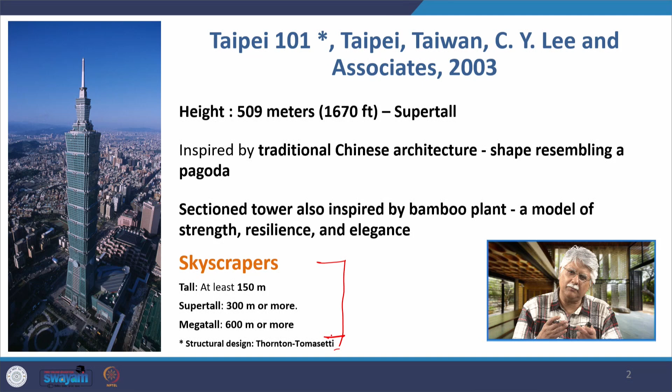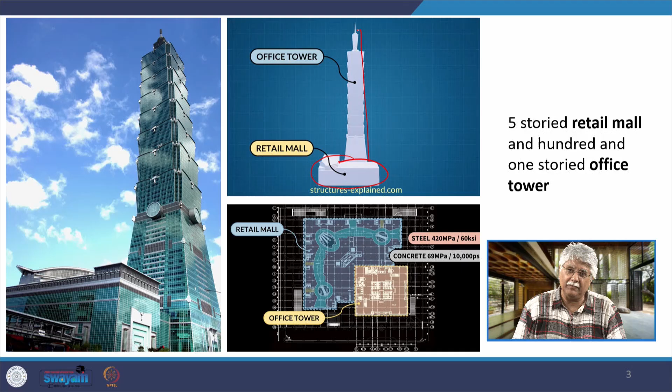This is what I was talking about, the various levels of skyscrapers: tall, super tall or mega tall. Taipei 101 has a 5-storied retail mall, and behind that is the 101-storied office tower. The structural design is based on the mega column and mega frame layout.

This, for example, is the mega column. This mega column is 3 meters by 2.4 meters. It has studs in it, internal ties, welded splices, and then it is filled up with concrete. So these are steel boxes, these mega columns filled with high strength concrete, and they form the basis of this mega structure of Taipei 101.

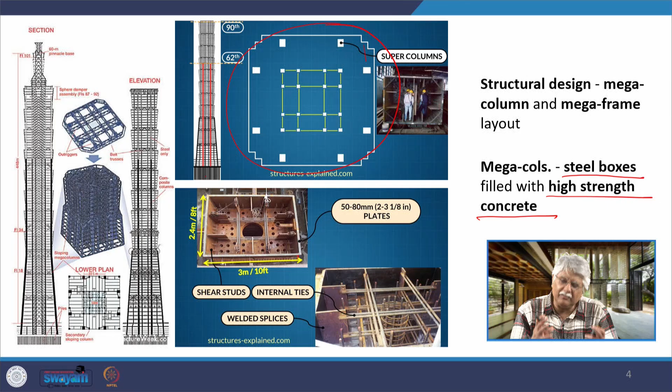There are 8 sections of 8 stories each within the Taipei 101. These sections and the top spire are shaped resembling a bamboo stalk or an elongated pagoda, so the 8 sections are like the sections we see in a pagoda.

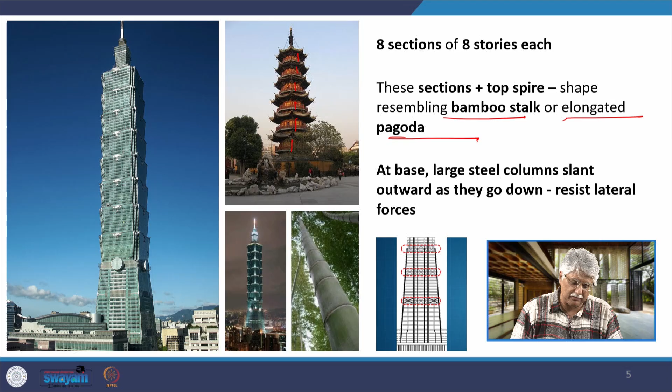At the base, the large steel columns slant or incline outwards as they go down to resist lateral forces. Now the tuned mass damper, which is one of the key features of Taipei 101, prevents the building from swaying too much in either direction.

It's an 800 ton, 6 meter diameter ball of welded steel plate, suspended from cables like a pendulum, working on the principle of inertia. It hangs inside the top of the building and is visible even from the restaurant and bar. How it functions is very simple.

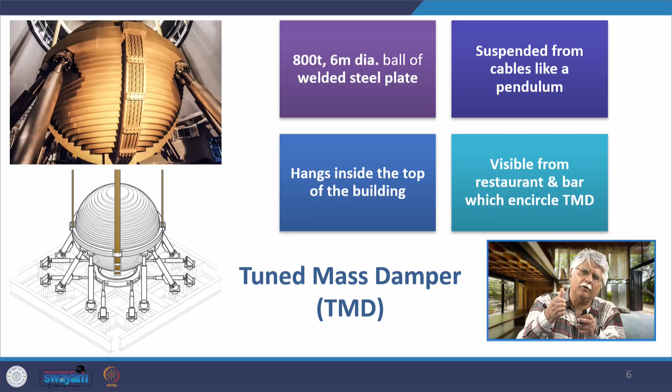When the building sways in one direction, because of inertia the ball doesn't sway, and thus it is able to pull back the building from the sway to its original position. It helps stabilize the towers in high winds and earthquakes, and also reduces the sway caused by typhoons.

This is how it hangs in the building, somewhere at the top. Occupant comfort increases during strong winds due to the tuned mass damper because it damps the sway. It can reduce the tower's movements by up to 40%. The TMD components were made in Canada, France and Italy, except for the massive steel plates, which were made in Taiwan itself.

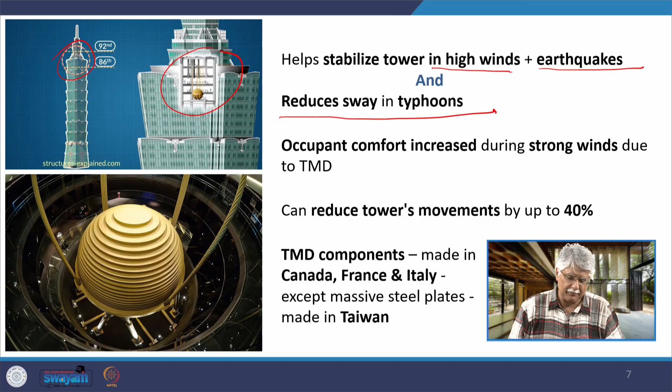Visitors in the restaurant, bars, and observation decks between the 88th and 92nd floors are able to see this huge gold ball of 800 tons. It has been said by one of the people of the building that this serves as a source of comfort, since people feel safe because of this massive damper.

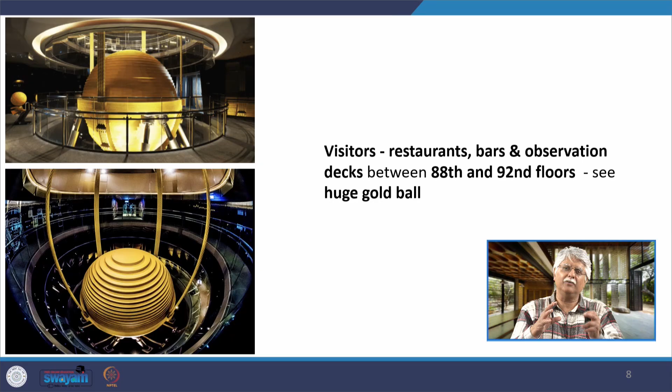When high winds and earthquakes cause swinging of the pendulum, it is restrained at the bottom of the sphere by large steel pins of 60 centimeter diameter, which engage piston dampers. There are piston dampers in the surrounding restraint ring located at the bottom.

These piston dampers restrain the ball from moving too much, and the TMD offsets the wind-induced motion of the building. Otherwise there would have been a tremendous sway that people would have experienced.

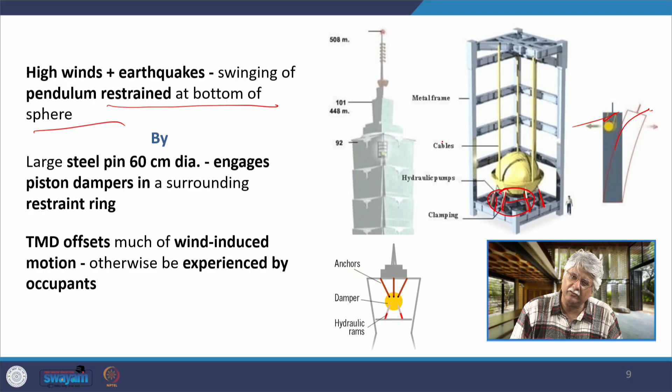As you can see here, as the building sways outwards, the mass damper remains where it is and is able to pull the building back to its original position. The most innovative feature of Taipei 101, besides the mega structure, is the tuned mass damper.

Now we come to the Hearst Tower, another project by Norman Foster in 2006. It's not a very tall building, just a tower mounted over an existing Art Deco style base structure designed by Joseph Urban in the early 20th century, featuring sculptures.

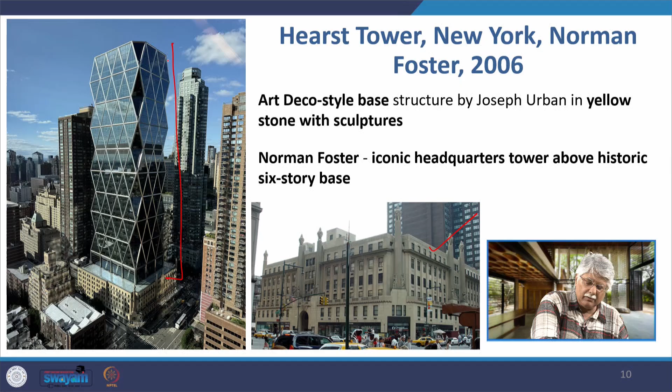This is that building. Norman Foster erected the iconic headquarters of the Hearst company over the 6-story base, using a diagrid frame to construct this building.

This building was the first commercial office building to get the LEED Gold certified rating for core and shell interiors in New York. The US Green Building Council considered it for this certification based on, firstly, the innovations adhering to principles of sustainable design and construction.

We will see the types of construction products, finishes and furnishings used by Foster in the design, the use of water and energy, the selection of the site itself, waste management, and indoor environmental quality.

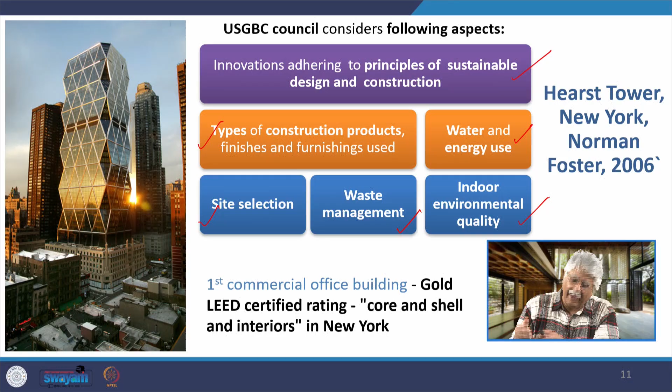Now this building saves both space and materials. Let us look at the material part first. Because of the perimeter diagrid system, it saves 20% structural steel as versus a moment frame structure.

That means if such a tall building was designed by Mies van der Rohe or Skidmore, Owings and Merrill using a moment frame structure, they would have consumed 20% more steel. This building has consumed 20% less steel than that frame, primarily because of the diagrid frame.

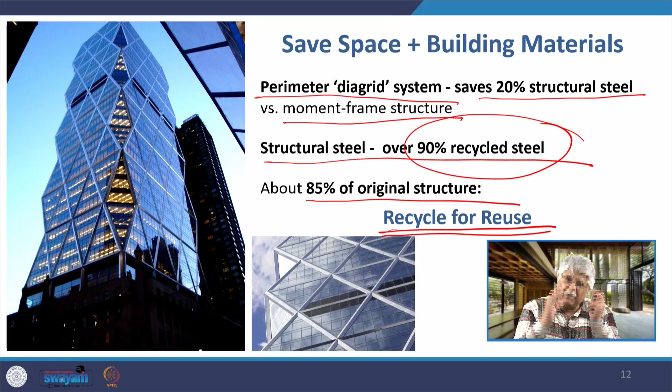Not only that, 90% of the structural steel used in the building is recycled steel. As a result, 85% of the original structure can be recycled for reuse. This is such an important basis for this certification, as there is so much reuse and recycling possible in this building.

When it comes to the diagrid frame itself, no horizontal steel beams are used, as I mentioned when talking about the Swiss Re building. Each triangle in the diagrid is 4 stories or 18 meters tall, and because of this 20% less steel is consumed — up to about 2000 tons of steel has been saved in this building.

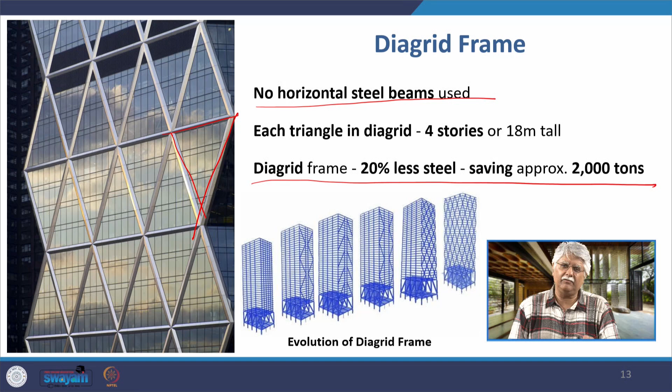The diagrid frame itself results in steel tube mega columns filled with concrete. These are those steel tube mega columns, filled with concrete and placed along the perimeter up to the 10th floor.

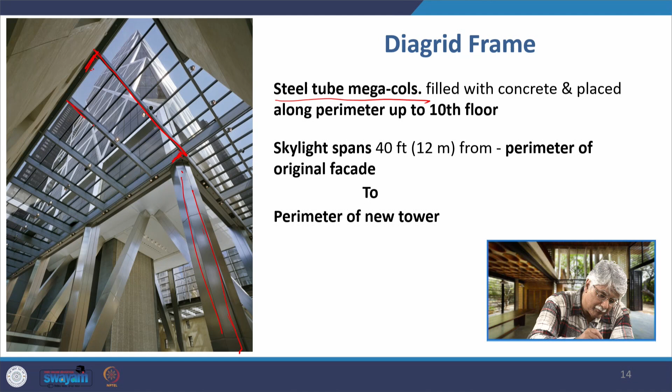And then there is this skylight that is 12 meters from the perimeter of the original facade to the perimeter of the new tower. This is 12 meters of skylight provided in the building. So when you are at this level, tremendous amount of light filters into the atrium.

Each steel and concrete floor plate is also 12 meters column free span, and the structural elements of the main lobby start at the 3rd floor, rise to the 10th floor, and also serve as lateral elements for the facade.

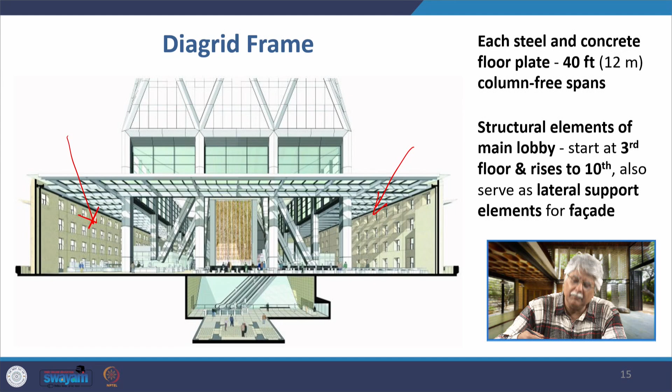You can go into these details about this building, you can study a little bit more online to understand the structure more clearly. But when we look at this building, the entire facade of the low height base, the original base, has been preserved, but it has been dug out, completely scooped out, and this 7-story atrium has been provided within.

The vertical glazing along the perimeter of the original tower is a clerestory from the 7th to 10th floor, and it illuminates the atrium along with the other lighting provided here. So the atrium ceiling and clerestory visually connect the old and the new structure.

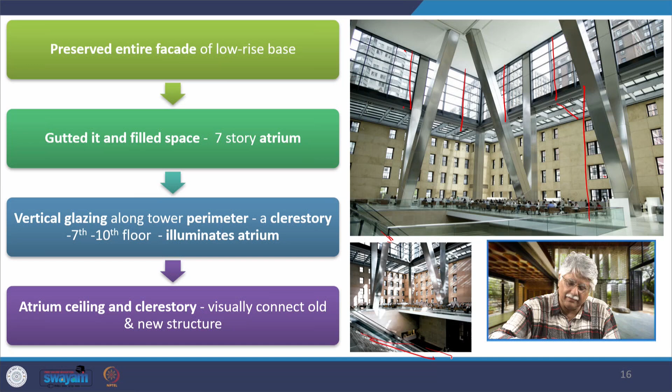Both buildings, this atrium space, this entire old building that has been converted into an atrium, provide the connection between the older and the newer part, and lead down further into a waterfall here, which is not visible clearly in the picture. There is a water cascade flowing down towards the underground part of the building.

Now we come to another building, the New York Times building in New York by Renzo Piano, 2000 to 2007. This building has a very strong urban presence, and what it does is make energy efficiency its goal, along with being very light and transparent in its visual appearance.

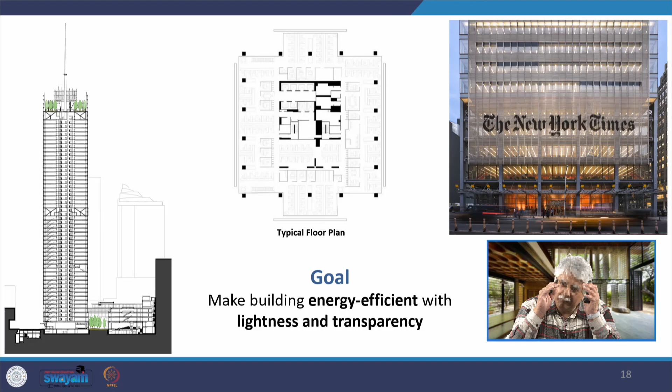It has got a permeable public space. If you look at the ground floor plan here, you find that the public can enter this floor area from the streets, and this gives rise to social activities and interaction.

In fact, what is it actually? It is a privately operated public space, as I talked to you about in the earlier presentation about POPs. It has got retail stores, restaurants, supermarkets, and this central courtyard that you see here, and an auditorium here looking towards the courtyard.

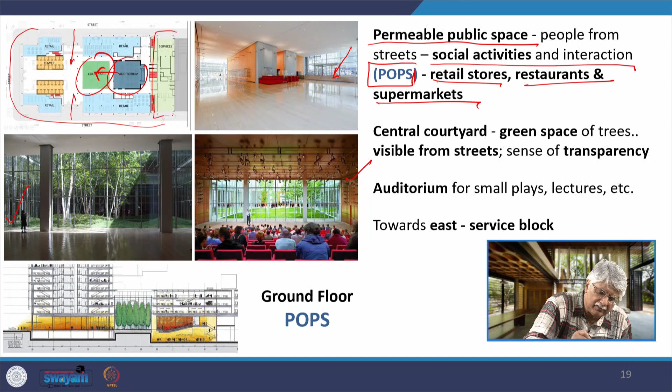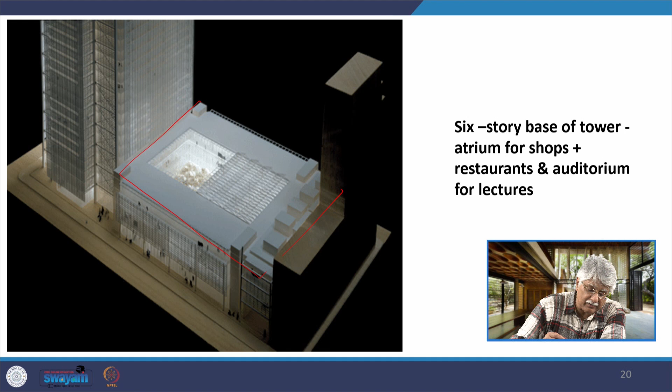So there's a lot of activity for people available at the ground level of the building. The auditorium is for small plays and lectures, etc., and towards the east side the services have been provided. This 6-story base of the tower has the atrium for the shops, the restaurant, and the auditorium for lectures, all accommodated in the 6-story atrium.

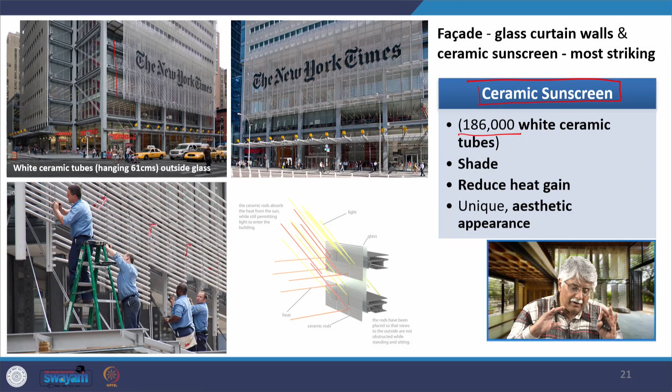Now in the facade there is the glass curtain wall, but in front of it a very unique system has been arranged by Renzo Piano, providing a sunscreen of ceramic tubes. These white ceramic tubes, about 186,000 of them, help to provide shade to the glass facade, reduce the heat gain coming onto the glass facade, and have led to a very unique aesthetic appearance of the skyscraper in New York.

Because of these reasons, this is a LEED gold certified building, incorporating energy efficient systems. One is the ceramic sunscreen that lowers the temperature and daylight coming indoors, helping indoor thermal comfort. There is a high performance facade, a state of the art lighting system has been used, and there is a rainwater harvesting or rainwater collection system in the building.

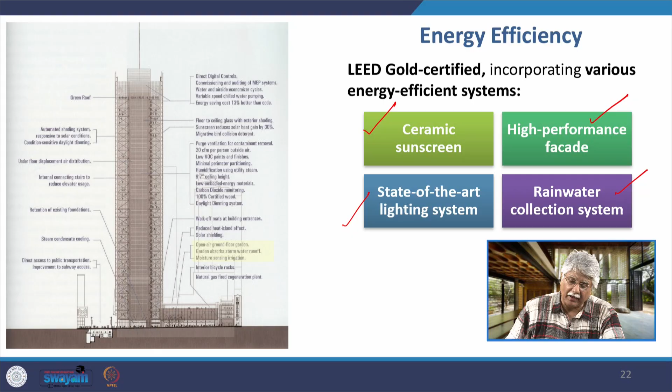Now I have talked to you about these two buildings, the Hearst Tower, which is also LEED Gold certified, and this building, which is also LEED Gold certified in its area. What is LEED actually? You might have heard about it, Leadership in Energy and Environmental Design. It's a green building rating system.

In India, there are two rating systems that we use. There is the LEED IGBC, the India Green Building Council, and we use the GRIHA system. So these two are being used by us.

LEED by itself has been developed by the US Green Building Council, an internationally recognized certification program for green buildings, which applies to a wide range of projects including residential, commercial projects and public spaces. The points are given based on sustainability measures implemented within the building design, in the construction and the operation of the building, and the points determine the certification level.

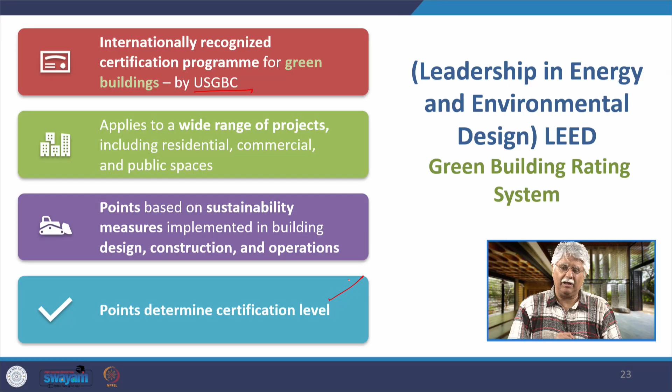If you look at the points in the certification level, a building is just LEED certified at 40 to 49 points. If it scores 50 to 59, it gets a silver certification, 60 to 79 gold, and 80 plus points it gets a platinum LEED certification.

There is an entire manual available, and if you have it in front of you and design your building according to the pointers given there, you can apply for the certification for your building.

The types of LEED certifications that are available: building design and construction, interior design and construction, operations and maintenance, neighborhood development, and there is one LEED specifically for homes.

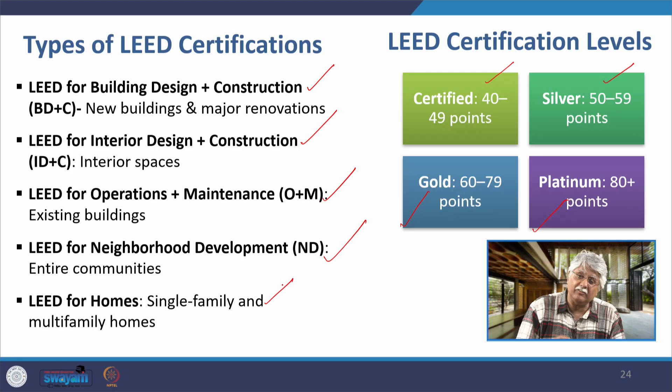There is a lot of advantage in trying to design LEED certified buildings, and a lot of commercial ventures are also endeavoring to have LEED certified buildings when they advertise for them, because it provides a certain consciousness among people, giving them the awareness that this building is an environmentally conscious building.

What all are the key LEED categories? There is the sustainable sites category, minimizing the environmental impact on the building site - while the building is being constructed, what all can be done to reduce the impact while construction is going on. Then there is water efficiency, reducing water use through efficient systems and practices while construction is going on.

And later on when the building is operated by the people who occupy it - energy and atmosphere, EA, energy efficiency using renewable energy and reducing carbon emissions or greenhouse gas emissions. Materials and resources: use sustainable materials in construction and minimize construction waste on site.

Improve indoor environmental quality by enhancing indoor air quality, lighting, comfort, even the sound quality inside the building. Innovations, IN, points to creative solutions and strategies used within the building, and regional priority refers to addressing regional specific environmental issues. So these are the key LEED categories.

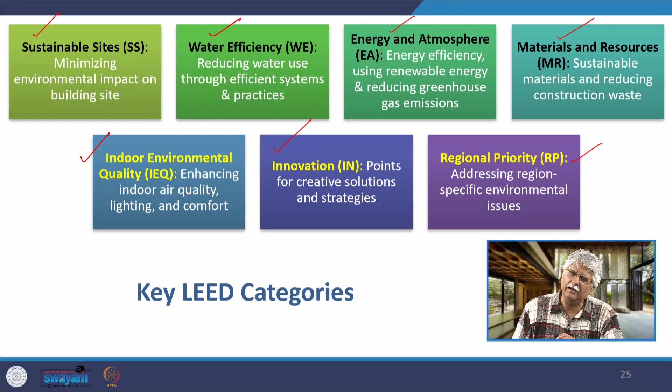Now the New York Times building by Renzo Piano is also a part of what is called high-tech architecture. I have not yet touched upon it - I will be touching upon high-tech architecture when I talk to you about styles and movements.

This was a specific branch under late modernism, and this deals with buildings that use high technology and resemble high technology in their features, in their appearance. One of the key features is lightness and transparency - the building appears light and transparent, and that is true for the New York Times building.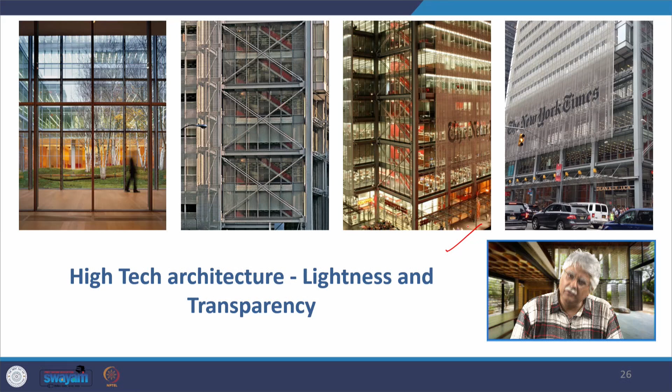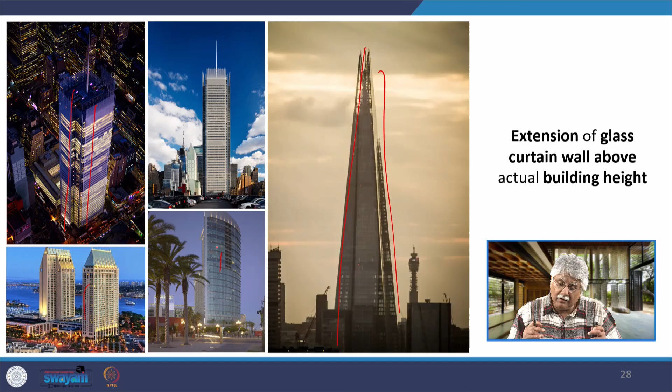This lightness and transparency is also visible from the interior of the New York Times building. Another thing that happens in the New York Times building is the extension of the glass facade above the roof level, above the building height, so to speak. We find the same thing happening, for example, in the Shard and in other buildings also, where the glass curtain wall has been extended above the actual building height.

Now let us come to another interesting building, the First Interstate World Center in Los Angeles, California, by Pei Cobb Freed and Partners in 87 to 89. So we are going back a little bit to look at this building.

The reason why this building is important is because it deals with two diametrically opposite issues but provides one common solution. It was supposed to be the US, now it's called the US Bank Tower. It is 310 meters tall, so it's a super tall building, and in this city vertical architecture was not suited because of the high seismic risk and many faults that are there in this site.

But they were also committed to preserving the historic architecture of this area, and also desired a landmark city center. So in the first case you should not design tall. In the second case, you are required to design tall so as to preserve the historic architecture, not demolish it by having a linear spread of a building, but also you need a landmark city center feature, which is a tall building. How do you reconcile these opposing things?

How do you make a building which is tall but has seismic safety in it? So Taipei 101 all over again, that same concept that we need to make it seismically safe. And this building in fact has been designed for a seismic resistance magnitude 8.3 on the Richter scale.

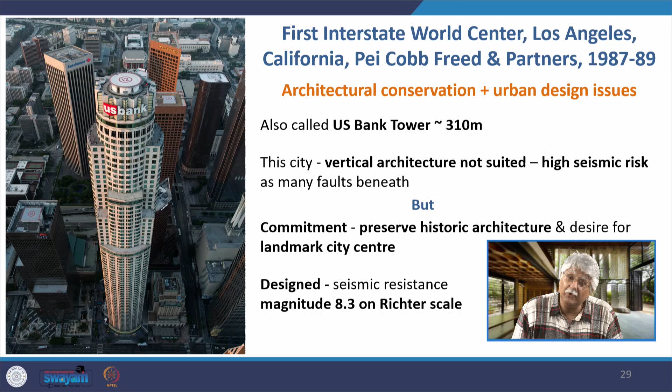Local earthquake conditions defined the structural system and resulting composition. The framework required to meet conflicting demands needed flexibility for earthquakes, and rigidity to confront wind forces, so a structural hybrid system had to be built. The geometric and structural elements are combined to create an iconic architectural identity. This visual is a simulation of how the building responds to one of the 32 vibrations to which it has been subjected.

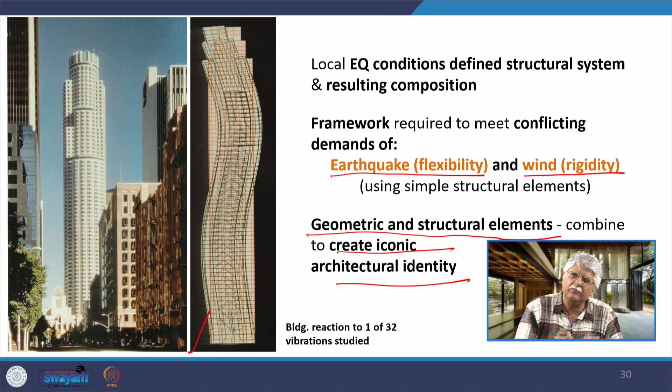In the inner core, because we wanted tall windows at the ground level to provide a street level experience for the building, the base of the internal core has been reinforced with 2-story high braces at the base. As a result, the tower's large window openings have been made possible at the base, and as you can see in this picture, there is an apparent lack of structural elements.

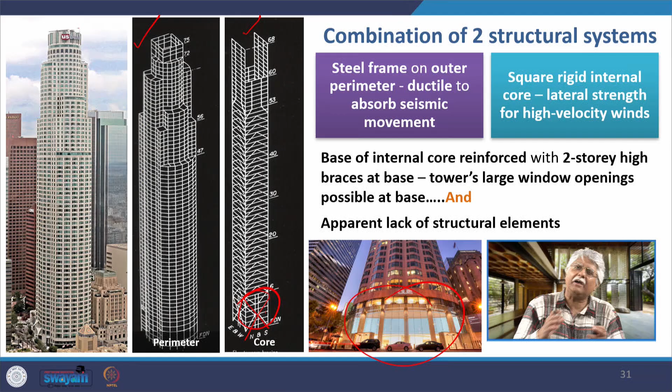So how innovatively structures have been evolving in skyscrapers to solve very typical problems.

Now when we come to innovative skyscrapers, this is the second part of this presentation. I'll talk about some of the latest innovative skyscrapers coming up globally. Like the Tianjin CTF Finance Center in China by Skidmore, Owings and Merrill in 2019, a super tall 530 meter skyscraper, and the Central Park Tower in New York by Adrian Smith and Gordon Gill in 2020, again a super tall 427 meter skyscraper.

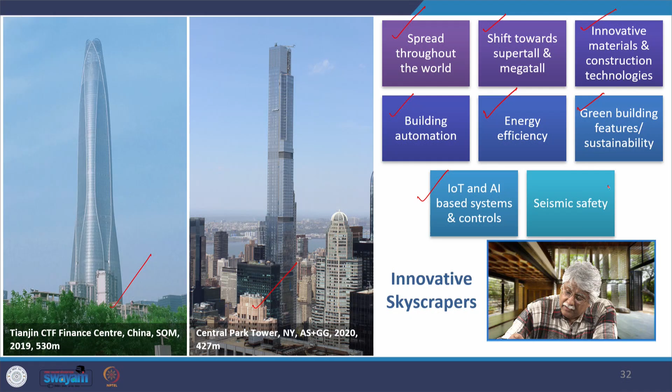Now when it comes to innovative skyscrapers, what are we finding today? Number one, they are spreading throughout the world, including South Asia, including India. The shift is towards super tall and mega tall structures. They use innovative materials and construction technologies. They use building automation at a very high degree. They are all involved with energy efficiency. They all try to incorporate green building strategies and sustainable features. They are basing their design on the Internet of Things and AI, particularly in the last 5-10 years, and these systems and controls are used in these buildings, and they are also keeping an eye on seismic safety.

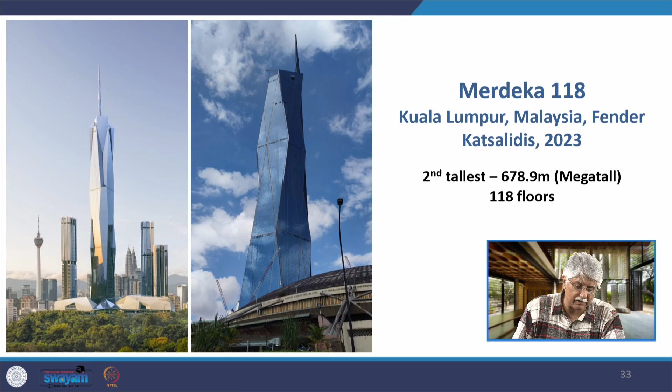So let's come to Merdeka 118 in Kuala Lumpur, Malaysia, which is now the second tallest building in the world at 678.9 meters, 118 floors. It's a mega tall building. Its triangular shaped glass facade limits heat gain, maximizes natural light in the way it has been designed, and reduces energy consumption. This is designed using the principles of parametric design, and as a result of these amazing digital tools and technologies, we are today able to conceive forms of skyscrapers and other buildings which could never have been conceived even 20 years ago.

Because of these computer aided design tools, CAD tools, we can imagine such amazing forms, and we can practically imagine that they can be built. But there is another side to it. If there is CAD, there is an addition to it today, called CAM, computer aided manufacturing. We are now able, using computer aided tools, to manufacture sub parts and sub assemblies of buildings. And even on site, amazing new construction technologies have now come in that help us execute the imagination of the architect on the digital tool. So CAD plus CAM plus modern construction technologies are making these amazing forms and shapes possible today.

So this triangular facade, along with limiting heat gain, maximizing natural light, and reducing energy consumption, also has a hydrophobic coating. What does this mean, hydrophobia? Hydrophobia is fear of water. This coating has, in a sense, fear of water. The water washes away the dirt with the rain, and this helps reduce the maintenance cost of such a tall skyscraper.

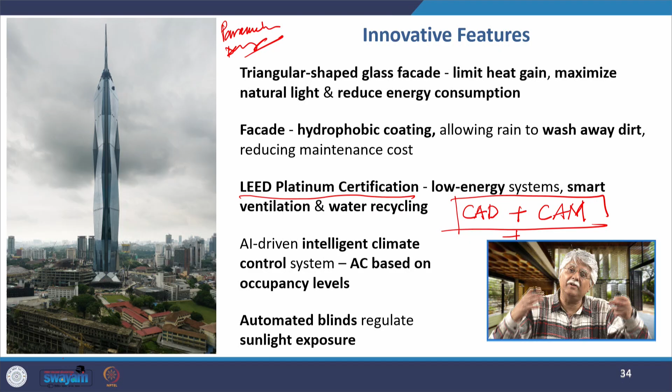By 2023, just about 26 years later, we are talking of AI driven intelligent climate control systems, in which the air conditioning is based on occupancy levels, the number of occupants in a room, and based on that the air conditioning load can be increased or decreased. This is all controlled through sensors. A lot of interesting study and research is going on even in IIT, where we are trying to understand how we can devise systems which can be occupant centric.

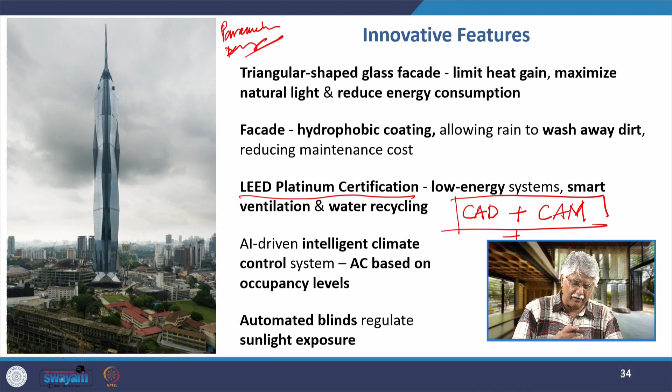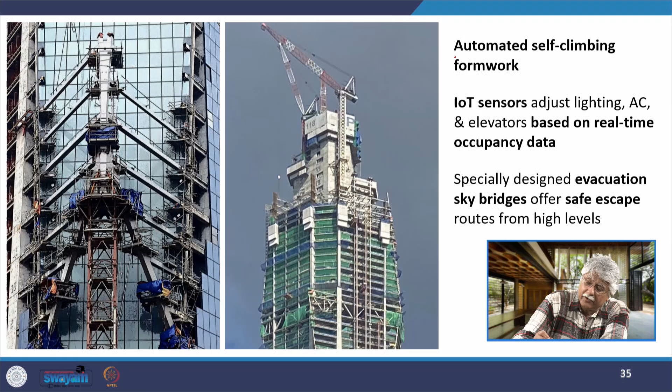Along with that, there are automated blinds which regulate sunlight exposure. Another interesting thing, very important for a mega tall structure, is an automated self-climbing formwork which climbs the building side and keeps building it as it keeps rising in height.

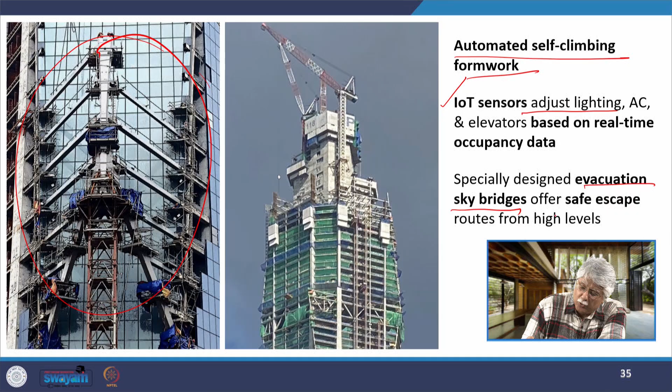Along with that, Internet of Things protocol sensors are used for adjusting lighting, air conditioning, and elevators based on real-time occupancy information. Specially designed evacuation sky bridges are vital for super tall, mega tall buildings, particularly because evacuation in these buildings in case of a fire or emergency can be very difficult and requires different techniques. One way is by providing evacuation sky bridges to offer safe escape routes from the high levels.

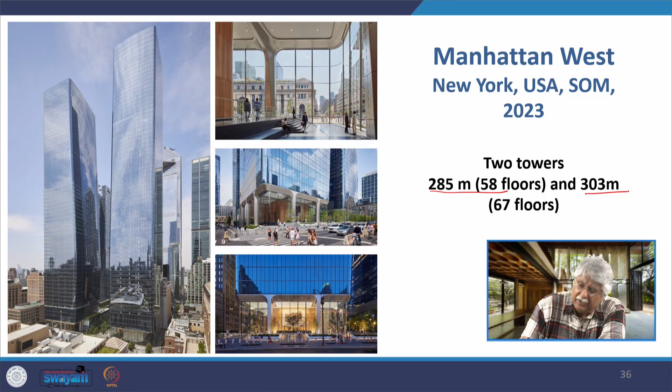Another set of buildings, the Manhattan West towers in New York, designed by Skidmore, Owings and Merrill in 2023. They are not very tall - one is 285 meters, 58 floors, the other is 303 meters, just touching super tall at 67 floors. The interesting part is where they have been put together - constructed by building a 2.6 acre platform under which run live rail tracks. Because of the rail tracks, this platform had to be built over them to support these massive towers, leading to the buildings being organized around a series of plazas organically as a result of the platform.

The AI based HVAC and lighting systems are used in the building, and AI based elevator dispatch systems are used to reduce waiting time for people and also to reduce energy consumption.

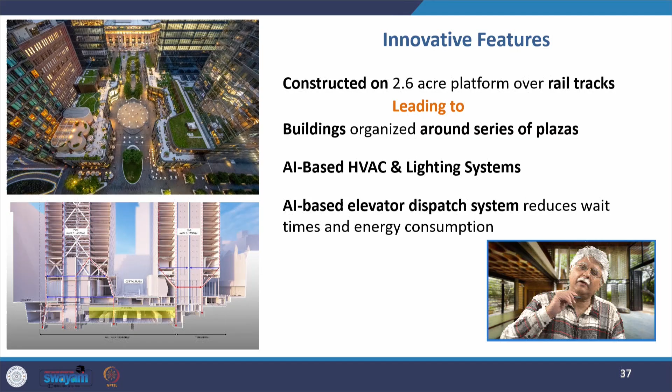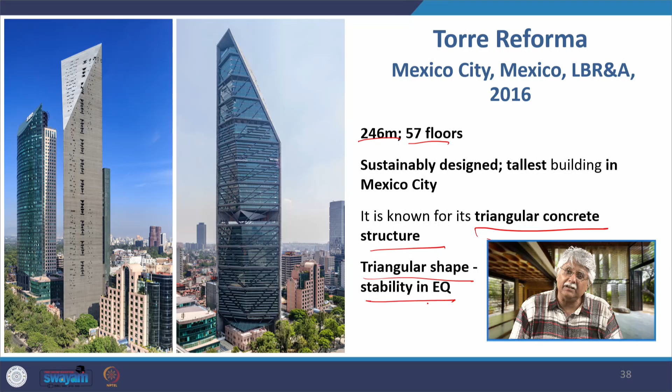Another building, this time in Mexico City, the Torre Reforma by LBR&A, not very tall at 246 meters and 57 floors, but it is the tallest building in Mexico City, sustainably designed. It is known for its triangular concrete structure, which provides stability in case of an earthquake. It has got an earthquake resistant cantilevered core, making it an earthquake resilient skyscraper. It's got a self-sustaining energy system of solar panels and rainwater harvesting, green walls and natural ventilation to enhance indoor air quality and reduce the overall carbon footprint of the building.

So we see buildings in China, buildings in Malaysia, buildings in United States, and now we are seeing a building in South America, in Mexico.

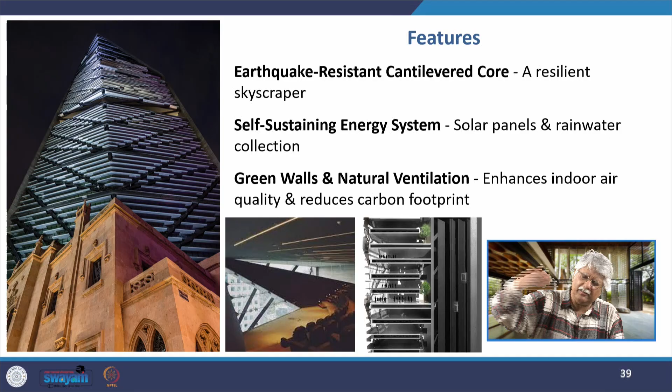Repeatedly, as I take you through these innovative buildings and skyscrapers, we are mentioning the same things over and over - efficient use of resources, efficient use of energy, automated systems, AI technology, IoT for energy, for seismic safety, for rainwater harvesting, for sustainable features - a whole gamut of issues being covered by these skyscrapers.

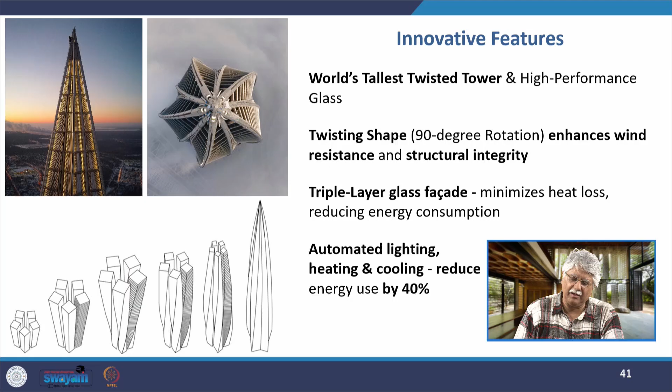Or we have the Ping An Finance Center in Shenzhen, China, standing at 599 meters, just a meter short of megatall, at 115 floors, an AI powered smart skyscraper with a smart HVAC system that automatically adjusts temperature and airflow based on occupancy. This is pointed out again because this work is being done in the IITs - we are working on occupant centric design, where earlier, 20 years back, the design was simulation modeling to make buildings energy efficient by lowering the air conditioning load. But now we are focusing on making it not just efficient for a room, but efficient for individuals.

How we can increase or decrease the load, how it can sense the amount of occupancy in a room, whether it's gone up, gone down, or even what the occupant's level of comfort is with regard to air conditioning. So, a lot of fine-grained studies are going on today, and some of these studies, after undergoing the kind of research work involved, are now becoming realities in many buildings today.

IoT-enabled workplace optimization uses real-time occupancy sensors to manage the utilization of office space and thus reduce unnecessary energy waste, and it is able to reconfigure office spaces based on how the occupants use the space within. The AI-enhanced smoke detection system is for early fire warnings.

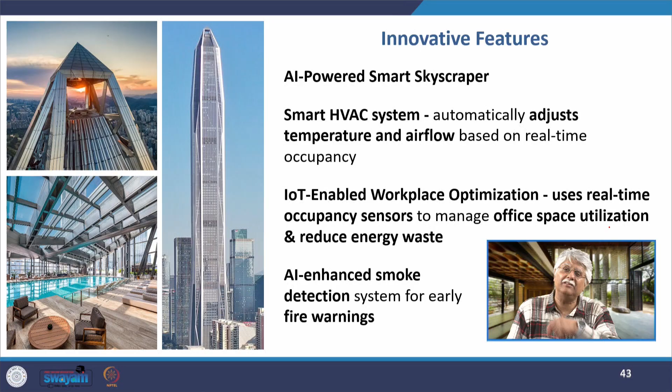So we have covered these skyscrapers that talk to us about these innovative features. The buildings I have covered are by no means exhaustive. There are far too many buildings being built today with these innovative systems and features, and it is up to you now, taking interest from whatever little I have talked to you, to go online or to your books and read more about other such innovations and innovative skyscrapers, and read in detail about some of the points I have mentioned about these particular buildings.

I will end this presentation by giving you a series of skyscrapers that we began with a couple of presentations back. Iconic skyscrapers, whether the Chrysler Building, the Empire State Building, or the Space Needle in Washington by John Graham and Co. Then later on, I will touch upon two of these skyscrapers, the John Hancock Center and the Willis Tower, when I talk to you about structures in skyscrapers. And then there is also the Trans-America Pyramid in San Francisco by William Pereira.

Later on, as we keep moving, we see the forms fundamentally transforming in skyscrapers, and we get the CN Tower in Toronto, Ontario, in 1976, which is 553 meters tall; the Oriental Pearl Tower in Shanghai, China, 1994, 468 meters tall; and the Petronas Towers at 451.9 meters in 1998.

We have the Burj Khalifa, the tallest building today, with the One World Trade Center that came up with the destroyed World Trade Centers. Then we have the Canton Tower in China, which is 449 meters high. We have Marina Bay Sands at 206 in Singapore, Al Hamra Tower in Kuwait City, and the Abraj Al Bayt Tower in Mecca, which is also at 601.

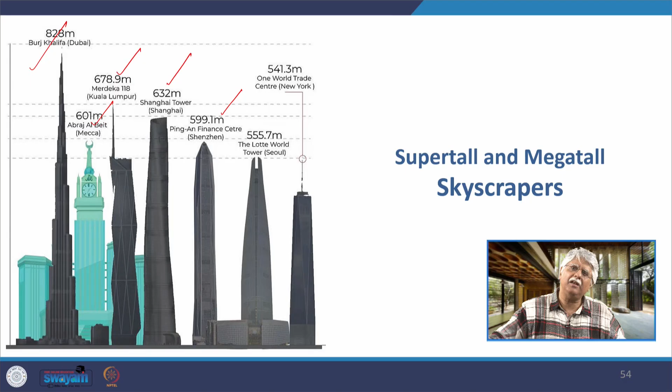So in fact, there are 4 buildings today lying in the mega tall category, and many buildings lying in the super tall category. We'll end here and continue from here with structures in skyscrapers. Now it's very interesting to see the kind of structures that came up and the kind of forms they resulted in, in skyscrapers. We'll see that in the following presentation. Thank you.